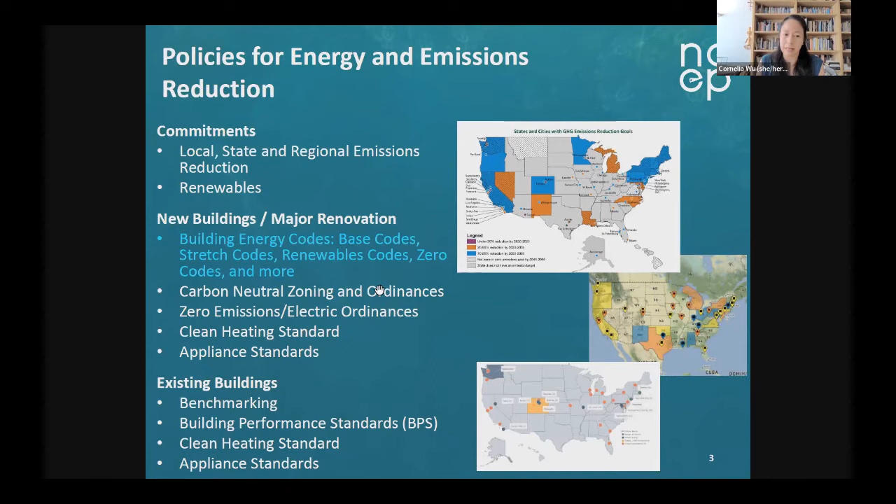So starting with building energy codes in the US, there isn't a standardized approach. There aren't federally issued standards, but we do have primarily two trade organizations which develop model codes. The first is the International Code Council, and the second is ASHRAE. The state or the local government determines which code to adopt, and there can be weakening amendments or strengthening amendments to these model codes, but this creates a patchwork of efficiency.

And depending on the state or jurisdiction, enforcement may be dependent on the population of a given area and the number of code officials available to enforce the codes. And many municipalities do seek to go beyond these base codes. That's what we will be talking about today. Stretch codes in particular are a way that, in the case of a state, the stretch codes can allow a jurisdiction to adopt that stretch code. And in the case of a jurisdiction, that becomes mandatory within that jurisdiction to make the more stringent code effective.

So in the NEEP region, which extends from Maine down to DC, 13 jurisdictions, we have 4 states that are currently on the 2015 IECC. Maine has moved to 2021 in its stretch code. They're currently on 2015, and they're looking at potentially moving to the 2021 base soon. Connecticut is also on the 2015, moving soon to the 2021. DC, again, 2015, moving to the 2021 and looking at stretch codes.

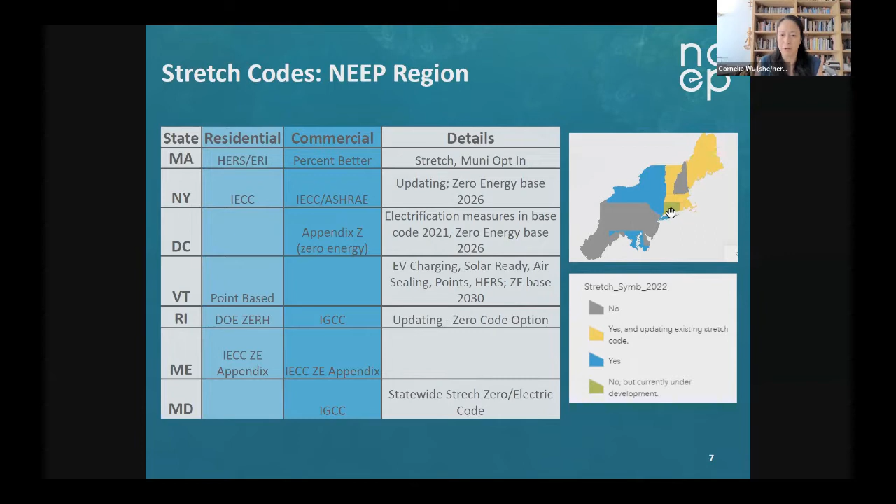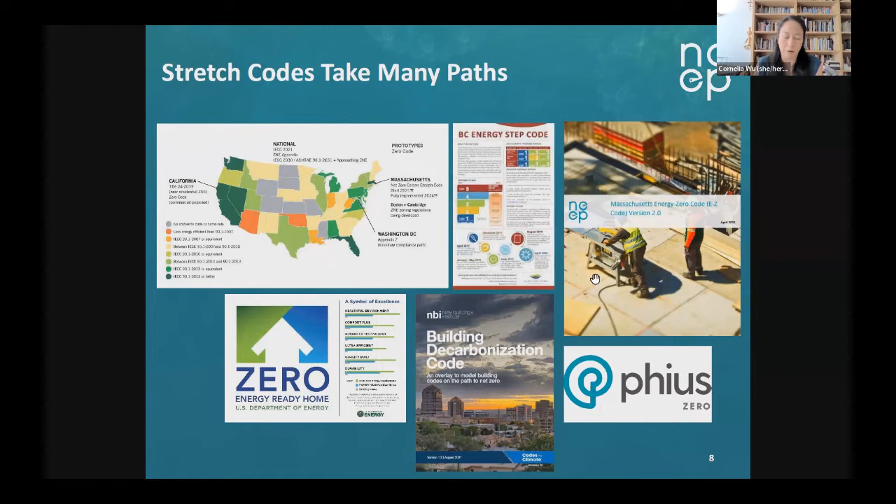And as previously mentioned, there are many ways to define a stretch code. One is, for instance in Maine, if you're on the 2015, to make the 2021 IECC, go up another model year to your stretch code. There is the Zero Energy Ready Home program from the US Department of Energy. One interesting method is the British Columbia Energy Step Code, where over time, each step becomes more stringent, reaching a final goal. And NEEP also has created a Massachusetts Energy Zero Code for both commercial and residential applications. You'll also see many stretch codes using passive house as either a requirement or an alternative compliance path.

And Massachusetts is a very interesting case. Right now, they are looking at adopting a new stretch code and a new specialized municipal opt-in stretch code. The second is basically a yet more stringent code than this first stretch code. There are 296 municipalities in Massachusetts that have become green communities. Those have previously already adopted the current stretch code and will automatically be elevated to the new stretch code, which will be released in December 2022, and then they will have the option to adopt the specialized stretch code. So I hope that helps situate what our panelists will be sharing with you today.

Our first panelist is Alison Lindburg. She is the Senior Building Policy Manager at Midwest Energy Efficiency Alliance, and she works to improve energy efficiency in buildings in the Midwest via energy codes and market transformation strategies, such as energy benchmarking. Prior to joining MEEA, Alison was the director of the Buildings Policy Program at the Minnesota nonprofit organization Fresh Energy, and also served on the board of directors for the U.S. Green Building Council of Minnesota and the Technical Advisory Committee of the GreenStar Residential Remodeling Standard. Alison is on the state-appointed Illinois Energy Code Advisory Council, and she is a voting member of the 2024 IECC Residential Consensus Committee.

I'll be speaking from a slightly different perspective, that of just one specific municipality, not at the state or regional level. So first, please advance the slide. First, just a little bit of background about Ithaca. We're a small college town in upstate New York. You can see our location in the map on the lower right there. Very small, about 20,000 people, and about half of that is students. So higher education is our main industry.

Most of you probably have either heard the term Ithaca is gorges or know someone who went to Cornell University. Our economy is pretty stable. Politically, we're very liberal in the Ithaca area, and our building stock, since that's what we're talking a lot about, is relatively smaller buildings. We do have larger institutions, educational facilities, a hospital, but apart from those, pretty small building stock.

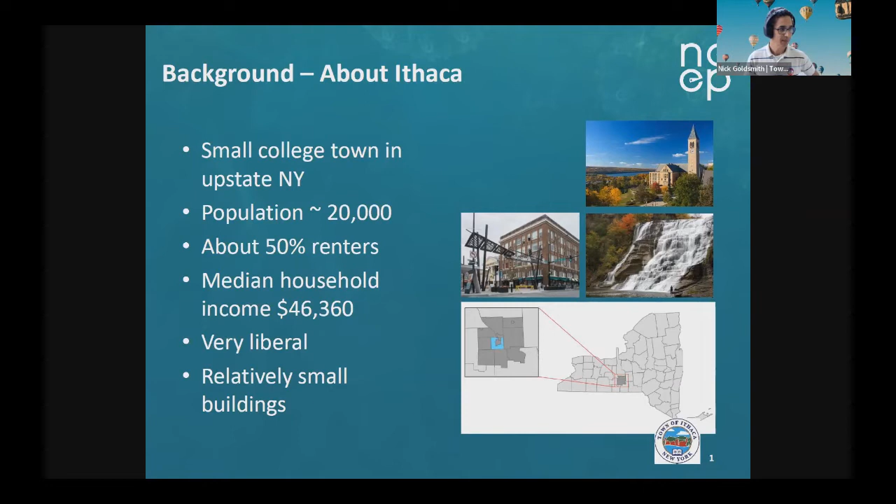Next slide, please. And just a bit more background. Cornelia mentioned the Ithaca Green New Deal, which has the bold goal of carbon neutrality townwide by 2030. And we've also got goals for our own town operations for the fleet and clean energy. Next slide, please. Mostly though, I'm going to talk about the Ithaca Energy Code Supplement. So this is local code requirements for new buildings and major renovations.

And so we have municipal home rule here in New York State, and Cornelia covered that we already have a pretty strong state code. So the Energy Code Supplement lays on top of all New York State Energy Code and the Uniform Code. All of those other codes still have to be complied with to the full extent. Our code supplement lays on top. There's a real focus on greenhouse gas emissions reduction, affordability through construction costs, electrification, mostly of space and water heating, and renewable energy. And I'll dive a little bit more into that.

Please go back again. The code was adopted in 2021 in both the city and the town of Ithaca. My position used to actually be split, so we did a parallel effort, and it went into effect last year. And just a quick note, this Energy Code Supplement shouldn't be confused with the City of Ithaca's electrification program, which is an optional program for existing buildings, which has gotten a lot of press in the last few months. That's a great initiative, but totally different than this Energy Code Supplement, which only focuses on new buildings.

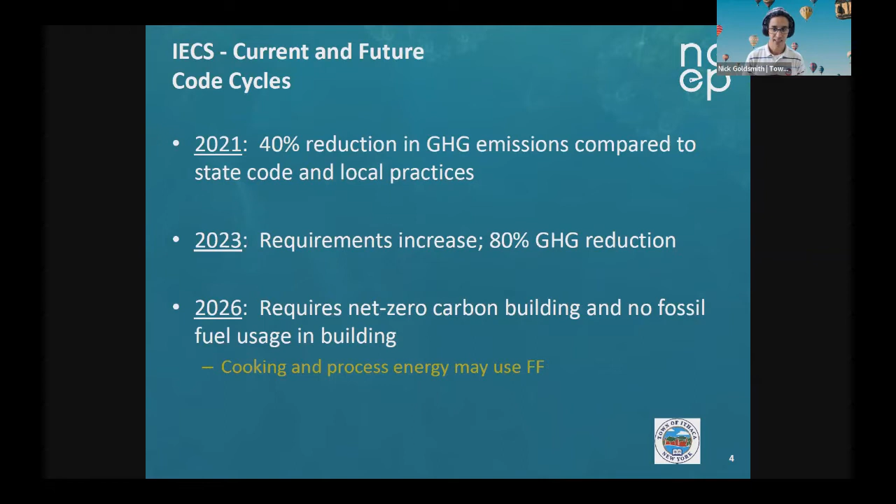There's two methods of compliance for the Energy Code Supplement: a performance-based path and a prescriptive path. The performance-based path we like to call the whole building path. It allows more flexibility in building design, but also comes with somewhat of a cost. May not be as affordable a construction cost.

But many organizations, developers are already using the third-party green building standards, which are incorporated into the whole building path. And so we wanted to make it easy for them. If they, say, already use LEED as a general practice, we wanted them to be able to use that framework and use those application materials already developed to help comply with the Energy Code Supplement.

You don't need certification to satisfy our regulations, but I do want to highlight that it's not just a simple LEED silver and you're done. We use the programs like LEED as a framework, but in LEED you would need 17 energy points at least. So that's significantly more challenging than just getting LEED silver or even gold.

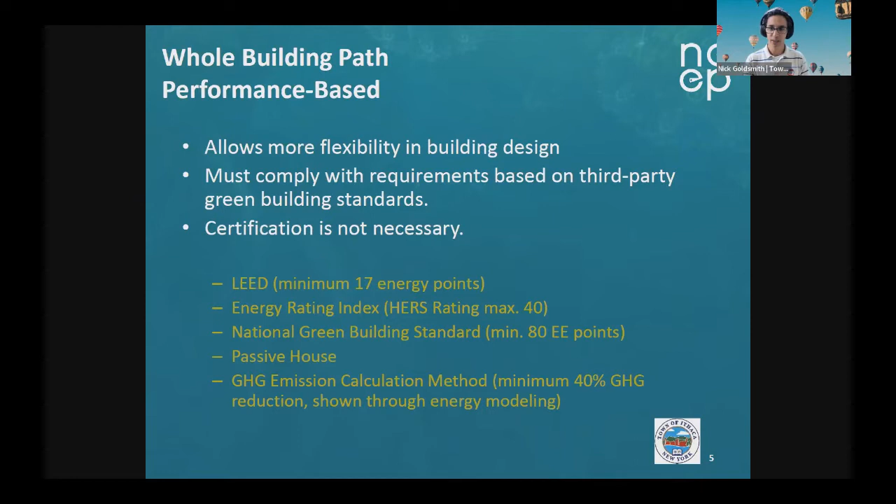Yeah, I can work with them. All right, I'll move on.

Okay. So the easy path, it's a prescriptive path. It's a customized point-based system. For the current regulations, you need 6 points to comply. And the calculation is each point is worth about 6 to 10% in terms of greenhouse gas emission reduction. And again, that's compared to state code and local construction. It's meant to be easy to understand, easy to use.

And so the analysis behind the 6 to 10%, it's fairly basic. It's spreadsheet analysis, and it's going to depend on sort of the interactivity between the points. But anyway, easy to understand and use, and 4 basic point categories of electrification, affordability, renewable energy, and those sort of catch-all other points. Next slide, please.

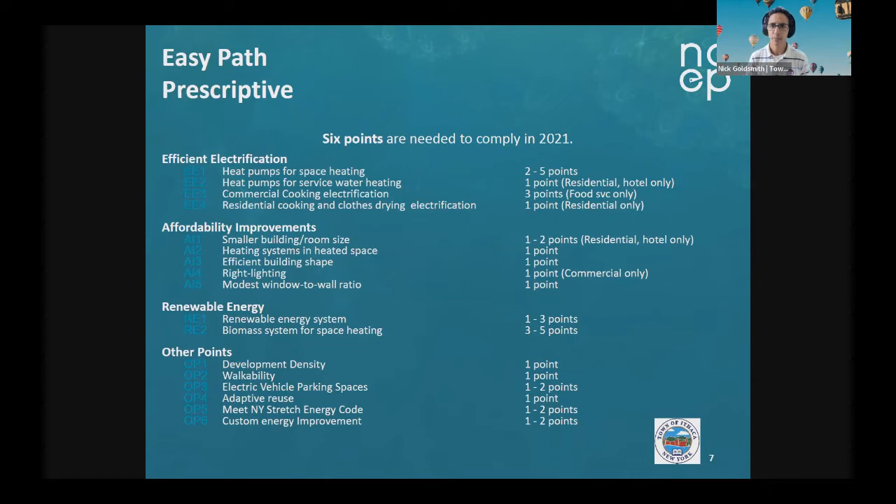Also had in that report a building stock review. So it looked at our existing building stock and projected for the future so that we could see the potential impact of this policy.

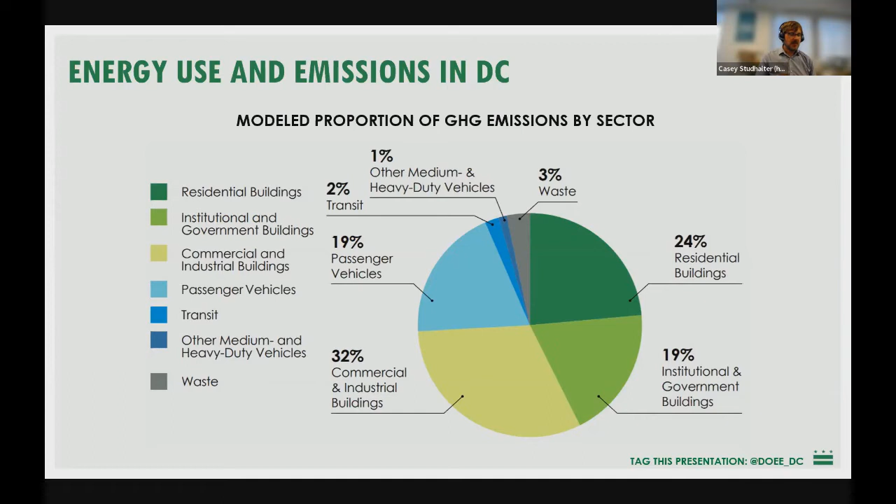I know in many of your jurisdictions, everyone's pie chart looks different. What the district does not have is a heavy industry sector that many other locations will, which would change the allocation of the pie chart. So I don't think it's that our buildings are any worse, but rather what's not included here, given the nature of our city, and there's a decent transportation mode split. So focusing on buildings is a really key piece for us.

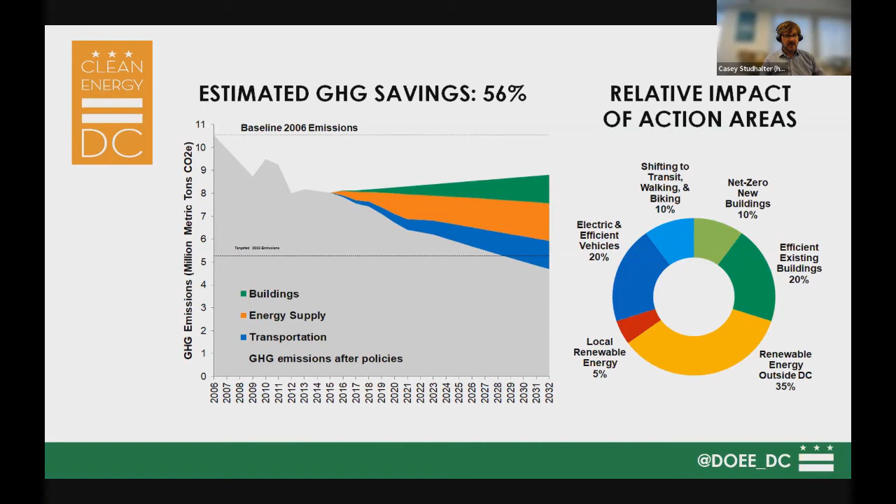I also like this slide because when we put together a slate of proposed policies in this plan, it became clear that there's no opportunity to pick and choose which is more politically palatable or technologically easier. It really all needs to be on the table in achieving this 50% carbon reduction goal. So we can't pick and choose, and we're advancing on a number of fronts simultaneously, which includes this goal for net zero energy.

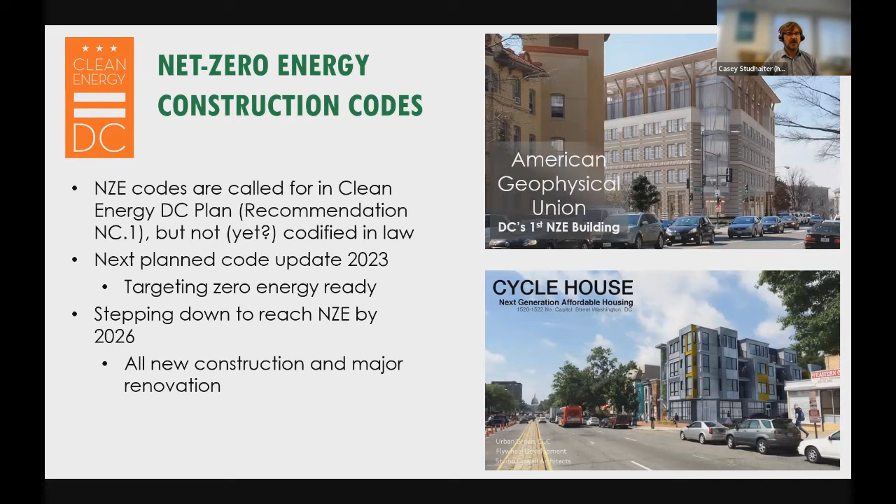And so we have, over the last few code cycles, been ramping down, trying to increase energy efficiency requirements in both the commercial and residential sections as much as possible.

This slide here showing a piece of legislation is now out of date, thankfully. There was a bill requiring net zero energy by 2026, essentially taking what we had as a goal and codifying it into law. That has since been signed by the mayor. So the goal of net zero by 2026 has been cemented in law, and certainly we are continuing to work towards that.

And all of this is to say that net zero energy is a strong goal for the district, and we've seen the creation of a stretch code as a way to telegraph to the market where we envision going with our code. That is the function of a stretch code in many ways: provide a way to gather real-time feedback from project teams on what may be that future language, and help define some of these terms.

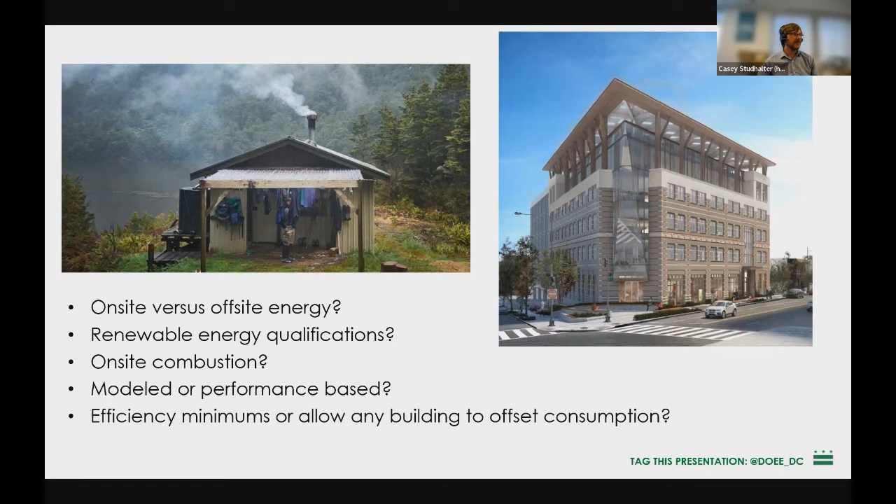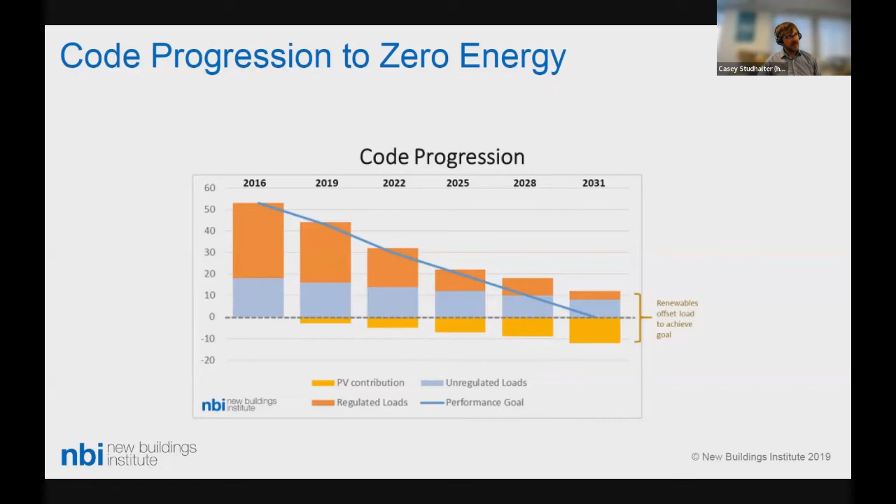And certainly no surprise to this audience, but again, the need for a homegrown stretch code for us was felt because the national model codes were simply not progressing quickly enough. And so this is a helpful image by the New Buildings Institute, showing conceptually how codes need to progress in order to achieve a net zero energy goal, shrinking those regulated loads to the maximum amount possible, in the process hopefully influencing those unregulated loads, and growing the amount of renewables. This shows photovoltaics, but renewable energy to help balance that. So that's the conceptual goal.

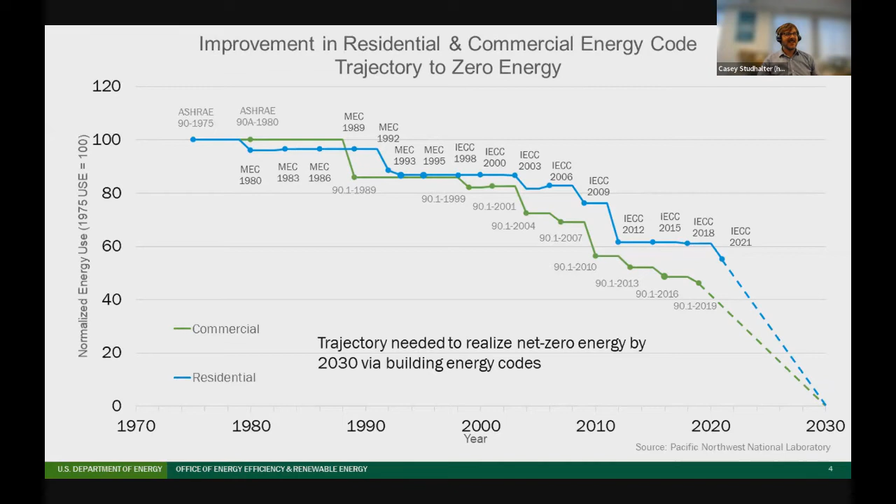And then tracking the national model codes, it was clear that relying on the model codes, even with strengthening local amendments, is unlikely to give us the performance that we need to really satisfy that goal in time. And so recognizing that trajectory, the dotted line there, is unlikely to happen in the code development, again, we felt the need to go out and create our own Appendix Z to the Energy Conservation Code.

So these are my last 2 slides that talk in more detail about what's in our stretch code. We haven't traditionally called it a stretch code, but I think really that's functionally how it operates. It is a voluntary alternative compliance pathway to our commercial energy code, and is, as I mentioned, intended to provide that working definition for net zero energy. And this was drafted with support from private sector partners like the New Buildings Institute and with our code development volunteers and apparatus, but was largely done here in-house, which was a long development process, and I wasn't even a party to the beginning of it.

But it's a serious undertaking, and I think what we're seeing now is there's a proliferation of other examples, and I think it is frustrating, and it's interesting to see many jurisdictions like ourselves sort of toiling away independently, but working towards the same goal. So to the extent that we can coordinate, forums like this and organizations like the REEOs are incredibly helpful for that.

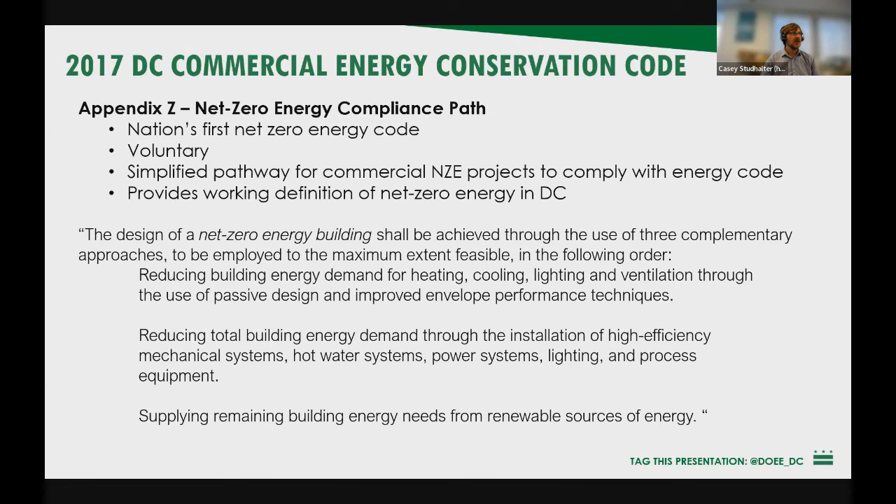So our Appendix Z tries in many ways to put some pretty tight minimums on efficiency before we even talk about renewables. And so this is sort of the meat of Appendix Z for us. We put some maximum heating and cooling demands taken from the Passive House standard. We utilized a zero energy performance index of 30 or lower. To be honest, we're moving away from the use of that ZEPI score for our next update.

I think it was found to be not as commonly utilized as we had hoped at the time when this was drafted back in 2016 and 2017. So identifying what that index may be as we move forward, we're trying to better align with the ASHRAE performance modeling in Appendix G, and utilizing more commonly understood modeling parameters and terms to make it as simple as possible. So I think Appendix Z was our first go, and we're finding we need to maybe find a better partnership between our stretch code with Appendix Z and the base code.

And then we carried forward commissioning and air tightness requirements. And for renewable energy, we prohibited on-site combustion with an exception for commercial kitchens, and then set a minimum on-site generation requirement before projects could look to off-site. Again, wanting to minimize transmission losses and really focus on doing as much on-site while recognizing that's unlikely to be feasible for all buildings.